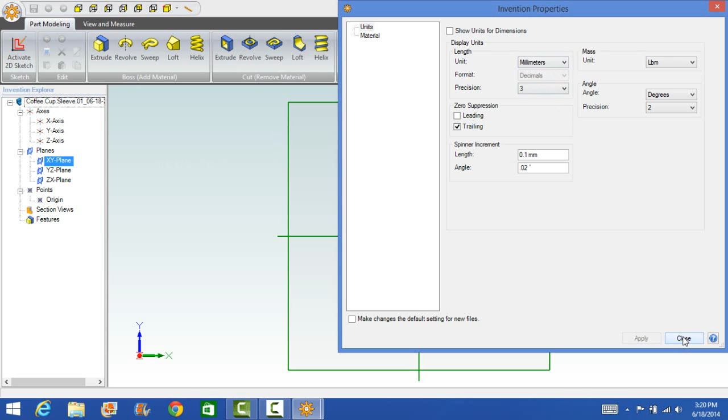If it's not, use the drop-down box to select millimeters and then select Apply and close the box. Since I'm already in millimeters, there's nothing to apply, and I'm just going to close the box. Okay, so the first thing is I've labeled my model coffee cup sleeve 01 with today's date.

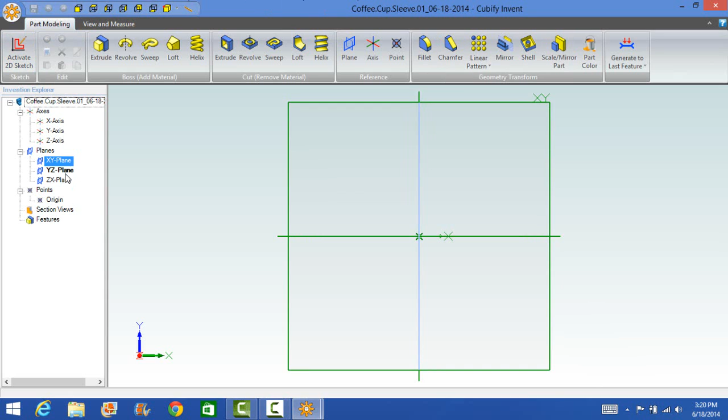So let's get started. First, we'll create some reference points to use in drawing construction lines. Just place the points with approximate distances because we'll put in the exact distances later. To do this, we'll click on Activate Sketch, the YZ plane, and now we're in the YZ plane as you see the Y axis going straight up and the Z axis going to our left.

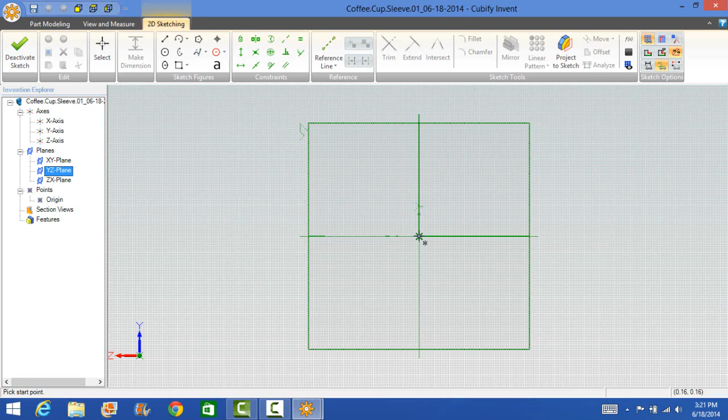We're going to create some reference points, so we'll left click on Reference Line, and we're going to start with the origin and place the crosshairs of our cursor right over the origin so that the crosshairs mix in with the two axes, and I'm going to left click it and I'm going to go up roughly 32 millimeters. Left click it and then I'm going to go up again roughly 5 millimeters. And now to get out of the reference line function, I'm going to pull it off to the right and I'm going to hit the escape key.

I'm going to go back again and select reference line, go back to the origin again, and now we're going to go to the left along the z-axis approximately 40 millimeters. And then we're going to go straight up again approximately 40 millimeters. Left click that line and we're going to go up again another 5 millimeters. I'm going to hit the escape key to get out of the reference function.

Okay, the next thing we're going to do is we're going to put in our exact measurements. We're going to left click Make Dimension. We're going to go back to the very first point that we clicked and we're going to go to the second point and click that. And now we're going to pull the box to the right and down and we're going to left click it and we're going to put in 32.5 millimeters. You may have noticed that as soon as that happened, that point moved.

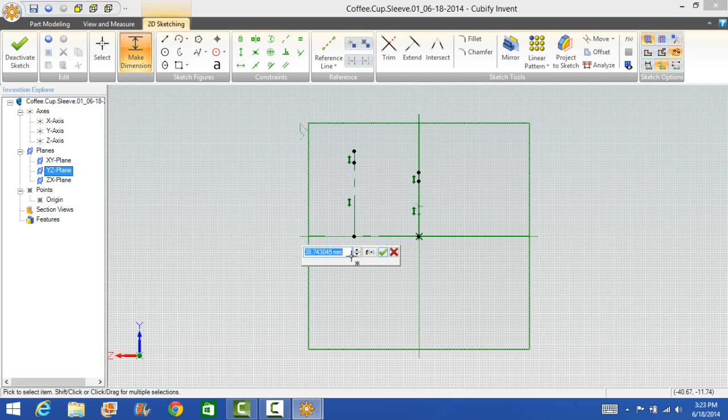Now I'm going to do the next point. I'm going to click point number 1 and I'm going to go to point number 2. Click on that, pull the box to the right, and we're going to put 5.0 millimeters. What we're going to do is go back to the origin. I'm going to go over and click the third point we used, pull that down, and we're going to say that should be 40.0 millimeters. And look at it move to the left.

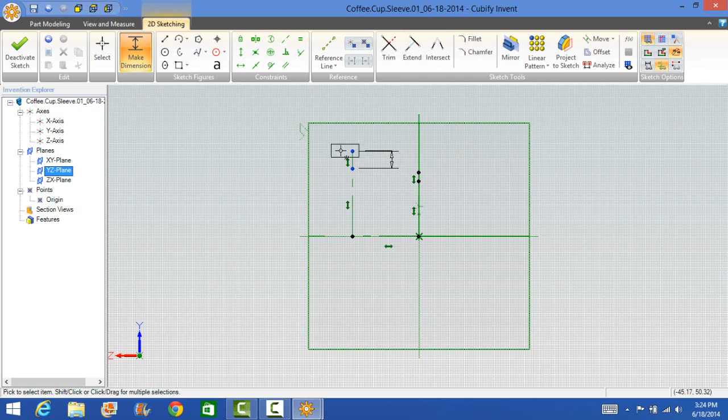So now we're going to click that point again, put 40.0 millimeters there. And then the last point, we're going to click the fourth point and go up to the fifth point, pull that to the left, left click it, and we're going to make that 5.0 millimeters. So now we've got 4 points that we can use to make our construction lines.

Go to Sketch Figures and Line Draw, and we're going to connect all 4 of these points into a closed structure. So the first thing I'm going to do is put my crosshairs right over the first point, wait for it to turn blue, and I'm going to left click it. Then I'm going to go to my second point, wait for that to turn blue and the crosshairs to join the axes, and I'm going to left click that.

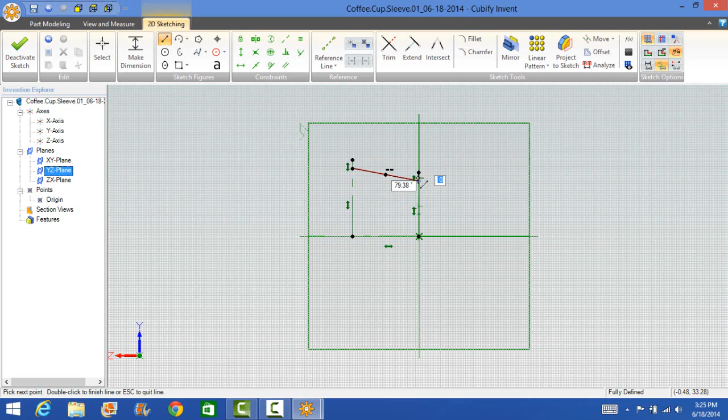Then I'm going to go to the third point. Again, wait for the point to turn blue, so I'm right over it. I'm left clicking that. I'm going to go to the fourth point, left click that, and I'm going to go back to my original point and left click that. At this point, I'm going to hit escape and get out of my line drawing function.

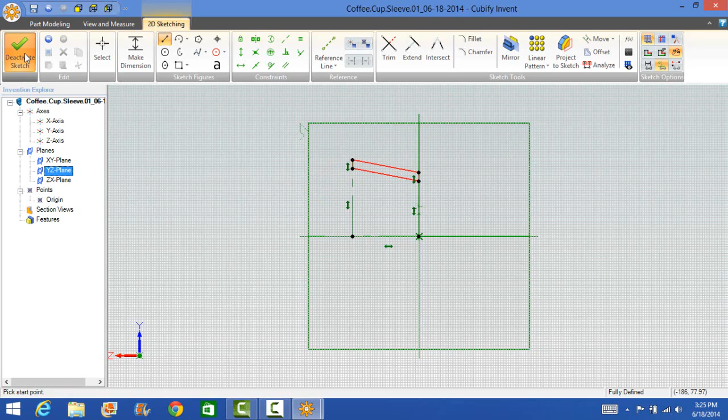What I'm going to do is I'm going to deactivate sketch. And now our 4 lines that were red are now turning blue. What that means is the computer's looked at this little sketch and it has determined that it's closed and able to be used in the next operation.

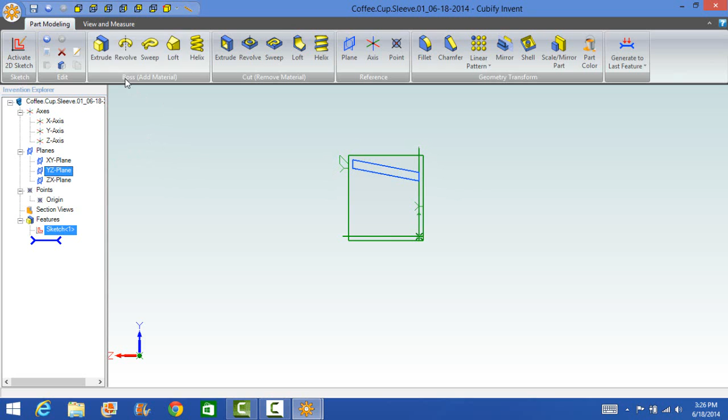We're going to revolve this sketch around the z-axis. So we're adding material, so we're going to do boss, add material, revolve, and left click that. Since the sketch that we just completed is sketch 1 and is blue, it's guessing that that's the sketch you want to use, so you leave that there.

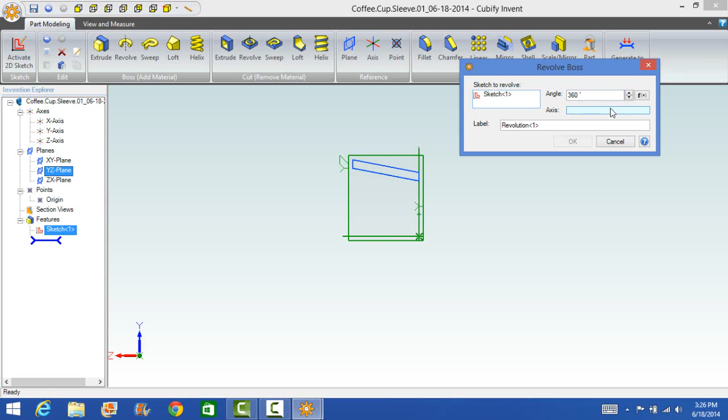It's also guessing that you want to go all the way around 360 degrees in your angle, so you leave that there, but it doesn't know the axis around which you want to revolve. To tell the computer the axis, you take your cursor and put it over the axis box, left click it and cause it to turn blue, and then you go over to your z-axis on your feature tree and you click that, and the computer guesses that you want to go around the z-axis, and in fact that's what we want to do. So we click OK.

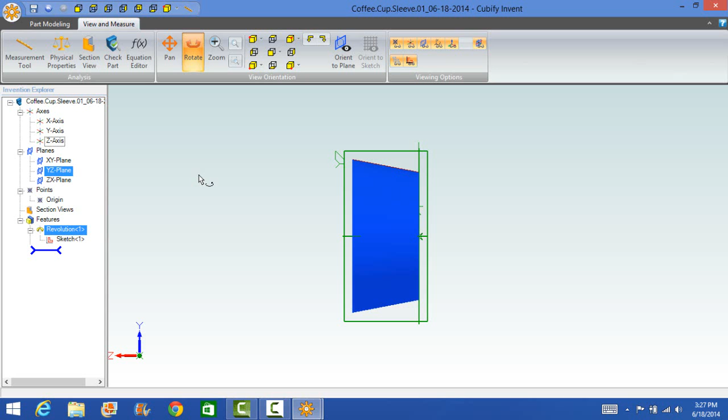And this is really cool because we've now used a 2D sketch to create a 3-dimensional structure. To investigate that, let's view it and make sure what we have is what we intended. So I'm going to go up to View and Measure. I'm going to go to select, left click, rotate. I'm going to bring my mouse cursor down into the operations panel, hold the left button down, and I'm going to move the mouse around so that I can look at my structure.

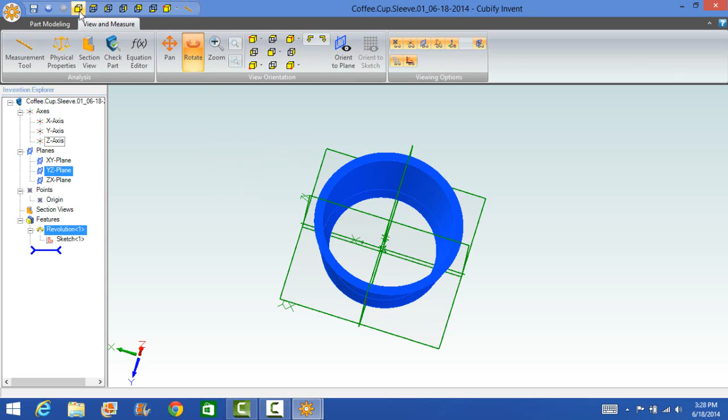At this point, it's smart to save your work so that if you make a mistake in a subsequent stage, you can go back and recover it. So I'm going to go up to the icon and I'm going to left click the front view so that my coffee cup sleeve is sitting on the XY plane pointing directly toward me. Then I'm going to go to the Invent icon. I'm going to select Save.

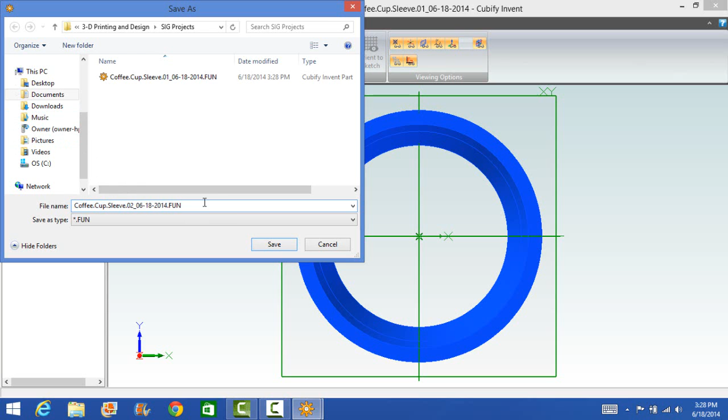Now that file is saved, but I don't want to work on that file. I want to work on another file so that I can recover my work if I mess up. So I'm going to left click on the Invent icon again, and this time I'm going to choose Save As. I'm going to go back and change my 01 to an 02 and click on Save. And you can see up on the top of my model, the title of the model is now Coffee Cup Sleeve 02 with today's date.

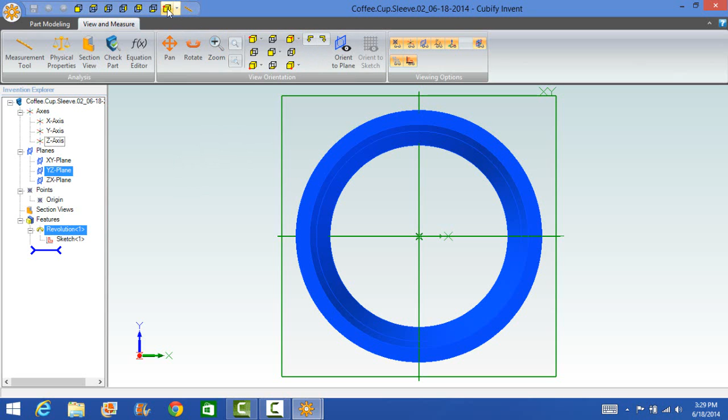Now this is another really cool trick that you can use. We're going to look at the edges, so what I'm going to do is select an isometric view of the coffee cup sleeve. So I left click isometric view, and now I can see my outer ridge and my upper lower ridge, and notice that they're kind of sharp and I want to kind of smooth them off. So we do that with fillets.

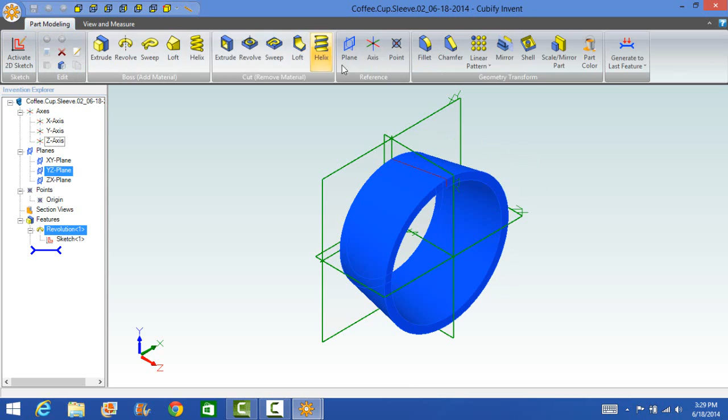So what I'm going to do is go left click part modeling again. This time I'm going to choose fillet, and I get a fillet dialog box. The radius that it assumes is 0.5 millimeter. My wall of the coffee cup sleeve is 5 millimeters wide, so I'm going to increment that to 1 millimeter radius. As soon as I do that, I'm going to take my cursor and put it as close as I can to the outside edge of the coffee cup sleeve. And I'm going to left click that and see that it turns black, and edge 1 is shown in the fillet box.

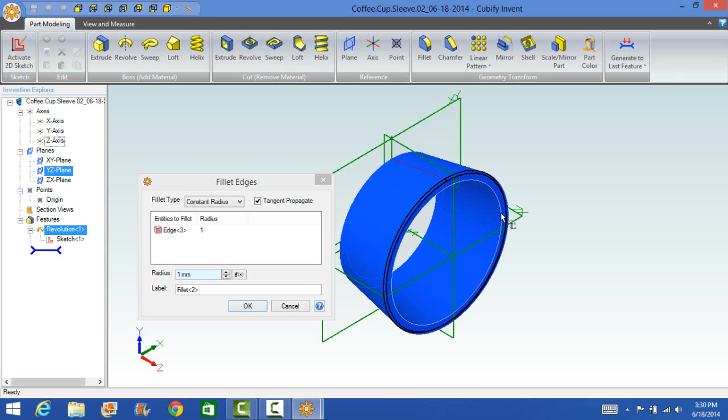Now I'm going to do the same thing, bring the cursor as close as I can to the inside edge, and I'm going to left click that and watch it turn black. Edge 4 is now in the box. Now I can't see the bottom two edges of my coffee cup sleeve, but here's another really cool trick. I'm going to go over, left click the drop-down box, and instead of choosing the isometric view with the dot in the upper left-hand corner of this box, I'm going to choose the isometric view with the dot in the lower right-hand corner of the block.

I turn my coffee cup sleeve around, which allows me to put fillets on those two edges as well. So I'm going to put my cursor close to that, left click it, and watch it turn black around the whole circumference. I'm going to put my cursor as close as I can to the inner edge, left click that, and watch the black circle go around that. So at this point, I've got fillets applied on all four corners of my coffee cup sleeve.

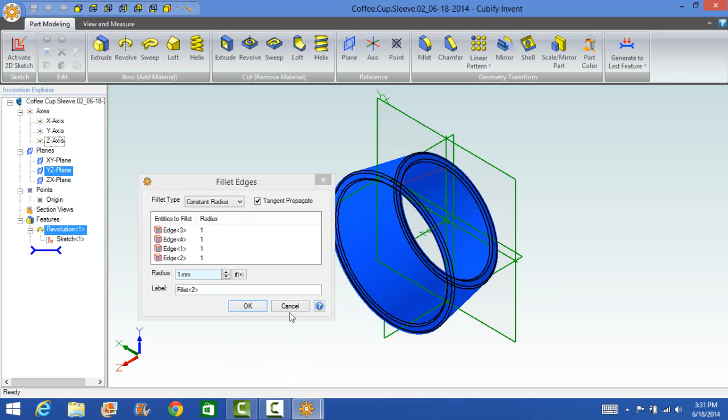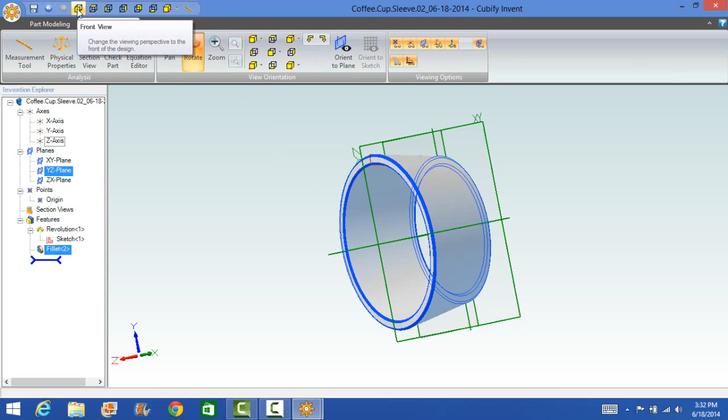I click OK, and now if I look at this, I look at View and Measure. I left click on Rotate, bring my cursor into the operation panel, push the left button down, and I spin it around, and I see fillets are on all four edges. I'm going to save my work, so let me orient it by left clicking the front view, and let me save that model under Save. Now I've saved it as the 02 version.

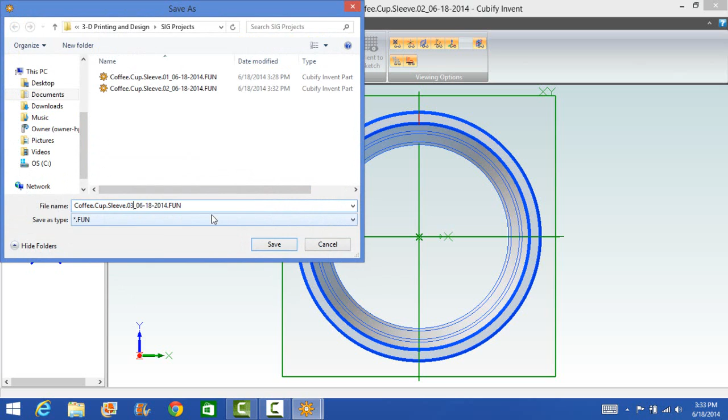Now I'm going to go and create an 03 version so that if I make a mistake in the next phase, I can go recover my work from the 02 version. So I'm going to left click Save As. I'm going to change the 02 in the file name line to 3, and I'm going to push enter. Now the file name that I'm working on is called Coffee Cup Sleeve 03 with today's date. Now I'm going to put some lettering on the outside of the wall.

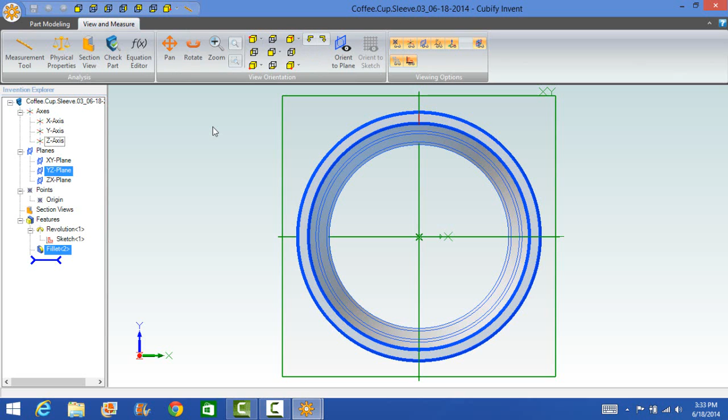It's as if I'm going to use a router, and I'm going to route the shapes of letters right through the wall. This particular program needs a plane with which to anchor that router, and that plane needs to be parallel to the YZ plane.

So I'm going to select Part Modeling, select Part Model, select Plane, and select it to the YZ plane, 47 millimeters from the YZ plane. I'm going to increment it very quickly by holding the increment arrow down until it gets to 47 millimeters, and select OK.

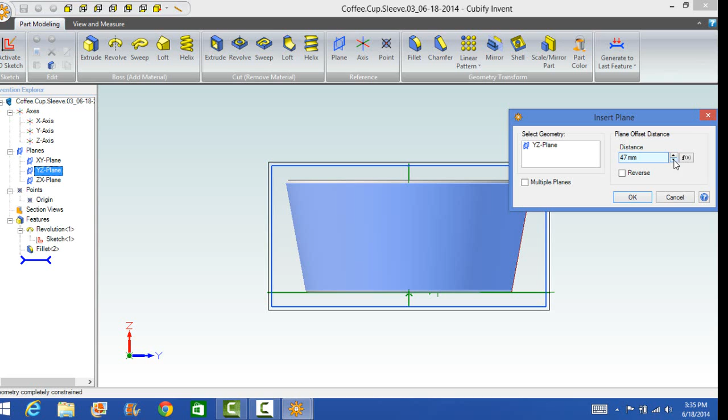Now I notice on my feature tree I've created a plane 3. So I'm going to activate my sketch again. I'm going to click on plane 3, and it's going to flip around.

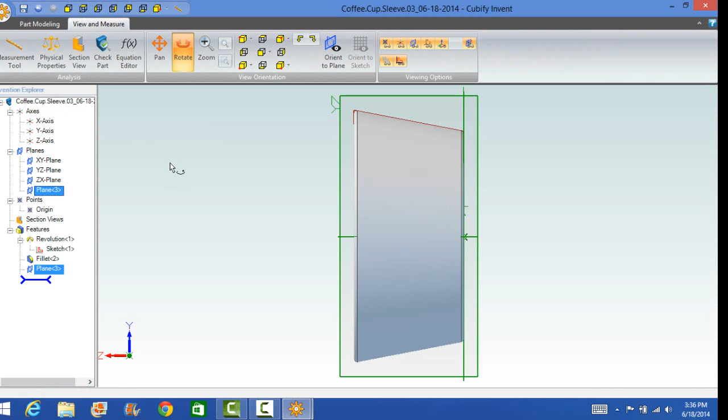Since what I did before was a little confusing, let me just deactivate my sketch, go back to View and Measure. Let me select Rotate, and let me pan around so you can see where this plane is, just on the outside of the coffee cup sleeve. So I'm going to orient to plane 3 again, and hit OK.

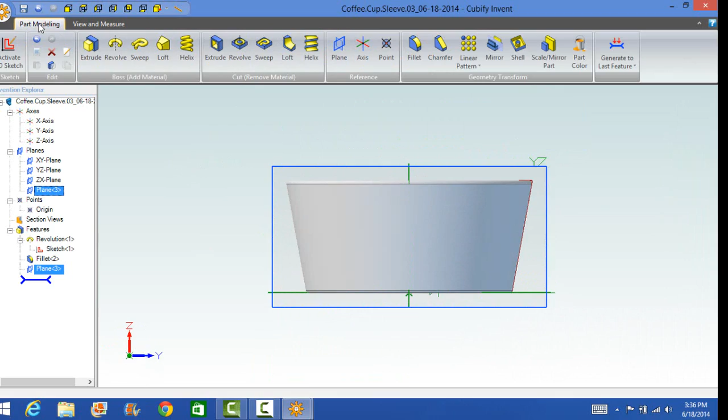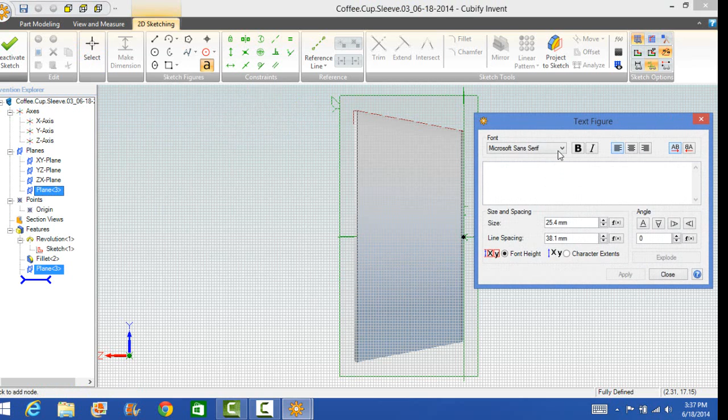We're going to select a sketch figure, which is called a sketch text, so I'm going to left click that. I'm going to choose as my font stencil, because I need letters like O where there is material left in the middle of the O, so that it looks like an O when I punch through it. So I'm going to select stencil.

I'm going to make my letters bold, since I'm going through a round sleeve, and make sure all my letters are centered or aligned in the center of the box. I'm going to select capital OLLI, Osher Lifelong Learning. So I hit lock, then hit enter to go down to the second line, and put in 3D.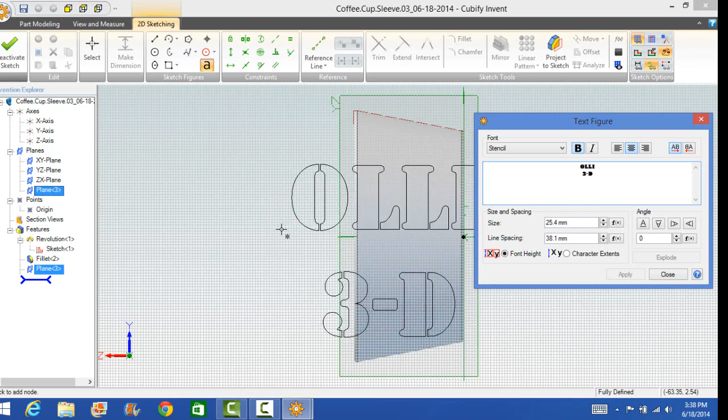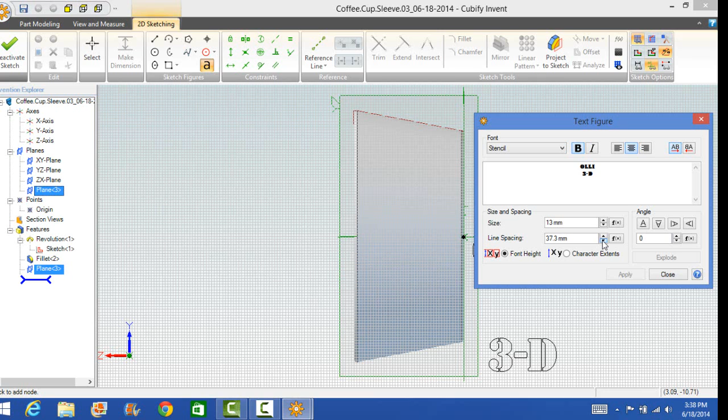Now the letters that I have, I'm going to pull them out from behind the box before I anchor them, and notice they're too large to fit on the coffee cup sleeve and oriented incorrectly. So I'm going to reduce the size of my letters by decrementing the size box to 13 millimeters. Since I have two lines, I'm going to decrement the spacing between those two lines to 14 millimeters.

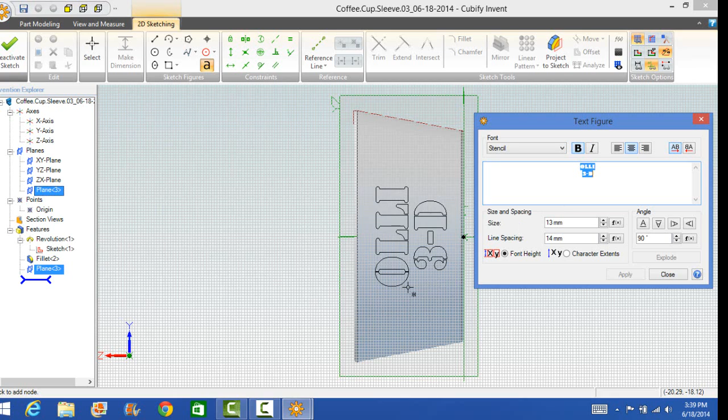To properly orient my lettering, I'm going to left click on the A pointing 90 degrees to the left. Now when I go place my letters on my coffee cup sleeve, they're the size that I can center. So I put them right in the center where I want them to be, and left click them to anchor them, then hit apply and they turn red, telling me they've been applied.

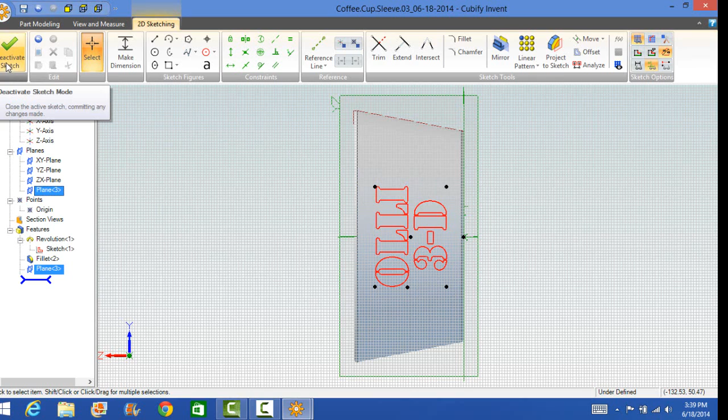So I close my dialog box, and now stay with me because we're almost through. I'm going to deactivate my sketch, and when I left click deactivate the sketch, look at what happens to those red letters - they turn into blue icons. Don't get concerned, they're actually still there, it's just the way the computer program works.

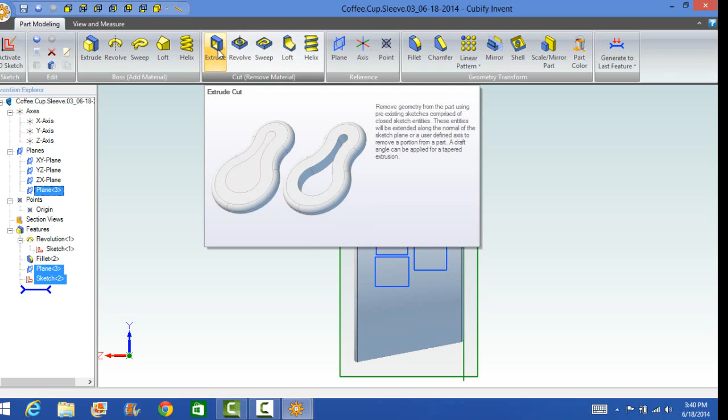I'm going to extrude cut through those letters by left clicking extrude cut. It changes my orientation, and I get a dialog box for the extrude cut function. Notice that reverse is checked and the numbers are minus. We've anchored our router to a plane that's 47 millimeters from the center of this cup, and the depth of the wall is 5 millimeters.

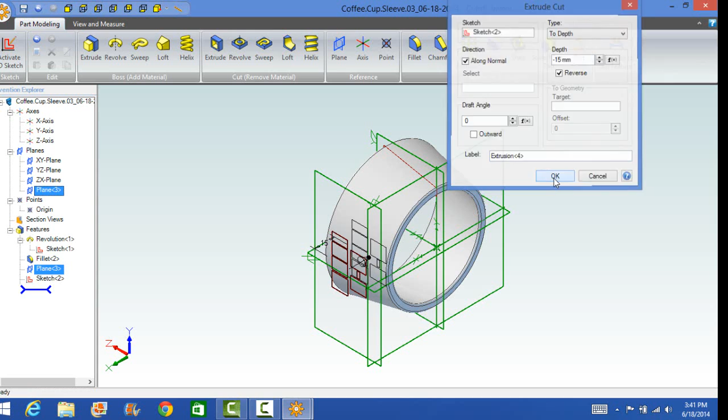So I'm going to decrement this from 5 millimeters to 15 millimeters to make sure my router will go all the way through the wall, but not so far that it goes through the other side of this sleeve. You can see on the graphics that the letters have moved, with an arrow pointing toward the middle. That's what we want - to a depth of minus 15 millimeters from plane 3. That looks good, so we click OK, and it shows up.

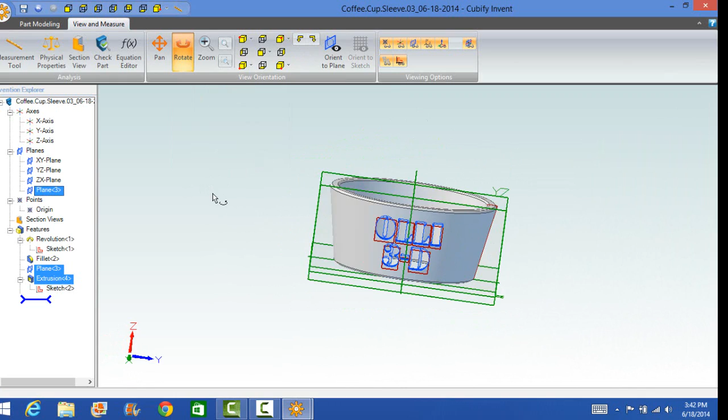So let's go back, look at View and Measure. Let's left click on Rotate, pull the cursor down into the work plane, hold down the left button and spin it around. And in fact, we've got letters that say OLLI 3D all the way through the wall. It looks like we're in good shape.

We'll go back and orient the sketch toward the XYZ plane with the front view, and we'll save our model just by hitting save. We've completed all of our work.